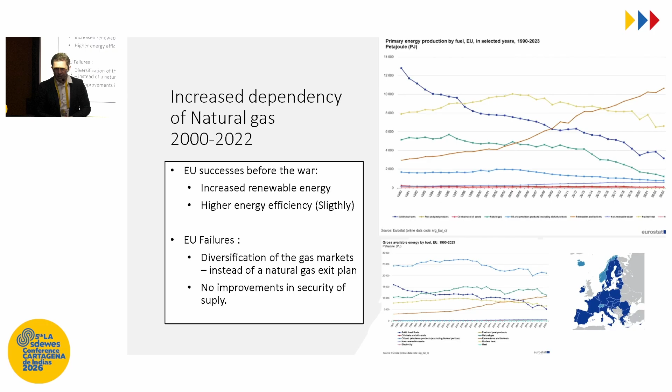The Juncker Commission in 2015 said they wanted to diversify the gas supply for Europe. That failed miserably, as I think is clear to everybody. So there's really a lot to say about what happened before the invasion of Ukraine on the 24th of February 2022.

The dependency was particularly large on natural gas, and the thing is, when you can transport something through a pipe, it can become very, very cheap. If you have a source and you can simply pipe it to Central Europe, it becomes a cheap commodity, which is of great interest, knowing that you have to produce something.

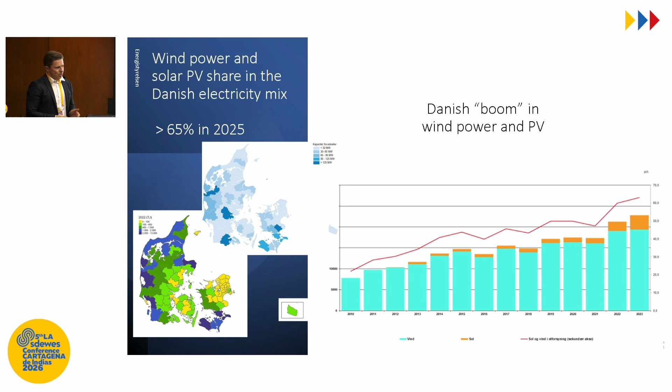What's important to understand is that Denmark is also a little of an outlier. I'll come into that in a minute, where I compare to some of the other EU countries.

When we do the transition and when we want to have better competitiveness in the EU, it's important we choose the cheaper electricity production option, and this is from Lazard, from a levelized cost of electricity. You can ask me afterwards about system integration costs, combining with batteries and whatever. But you have to understand that if we have an energy system mainly based on electricity and not burning fossil fuels, the system integration part is so minute and small compared to the overall cost of electricity production. So you want to focus on enabling a lot of the cheapest options on renewables.

Neven already talked a little about it - PV, especially utility scale, are very, very cheap options in many parts of the world. In Europe, onshore wind is cheaper in many places compared to PV. And after that we can also see offshore wind, which is down here.

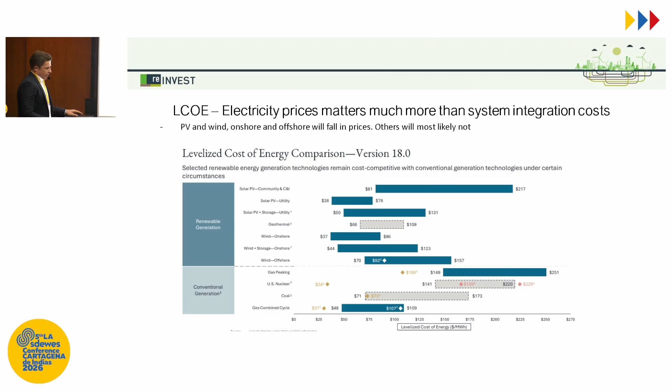So this would be the marginal price. But for me, it's a little strange to have this number here, because I'm missing the zero on the wind and the zero on the PV up here. So if we imagine some kind of imaginary bank that comes down from the moon and pays for the nuclear power plant and says, now you only have to pay $34 per megawatt hour, I would rather have they paid for 5 times the amount of renewables and said you have to pay zero for that. So this creates a lot of trouble, in my opinion, to understand this.

Another thing about the electricity supply from these renewables is how different they are. Now, in this part of the world, PV, of course, can dominate the system. But as was said, when you come up north, we need more supply of wind power as well. So if you have PV in Europe, or at least in the northern part of Europe, then around 85% of the production will be within half a year, in the summer and in the daytime. And there'll be very little production in the wintertime. And we use more energy in the wintertime.

And here actually wind fits in very well. The wind production curve is blue, you can see it's slightly higher in the wintertime. When you design the system, it's really important to understand these elements - we call it the capacity factor. So if you have 1 gigawatt of PV in Europe, maybe it's around 15% capacity factor, or full load hours, however you prefer to call it, whereas onshore wind would be between 25 and 40% depending on where you are in Europe. And this has a huge impact also on how you design your electricity grid.

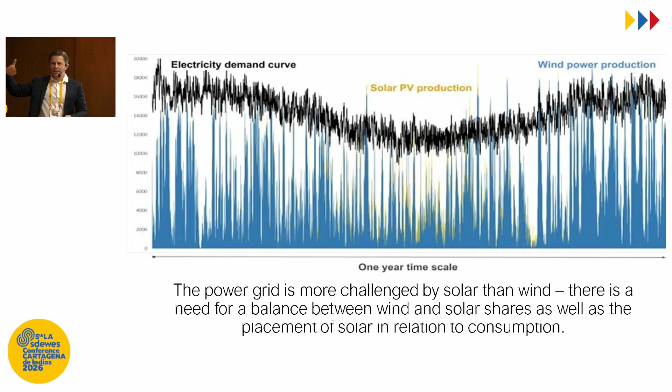It's a little hard maybe to see this, so I'll try to explain it. If we look at the Danish system, it's often looked to as a sort of role model for what you can do. But in effect, Denmark is a very, very small country surrounded by countries that have 4, 5 times, even 20 times the electricity demand that we do. Of course, we don't have full connection with these countries, but we have connections with them. If we had no connections, we would not have 65% wind and PV.

We would have somewhere around 45-50% - that would be the maximum in the combination of wind and PV, from a structural point of view, also considering what we lose in summer. This means that if you transfer the 65% figure to all European countries, you're making a really bad mistake. You can't simply copy that number. You can do something by changing the demand side - I'll get into that in a minute.

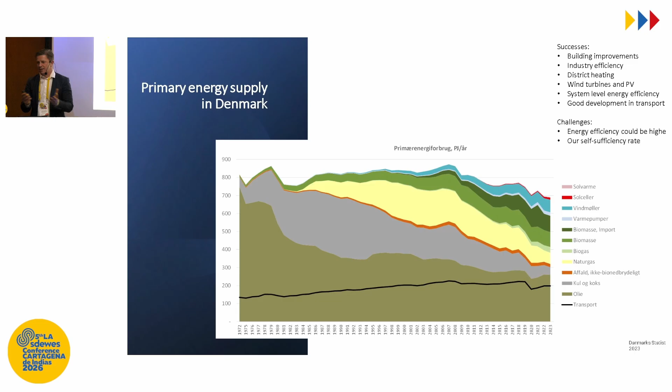Anyway, so what has started to be done here in Denmark is to redesign the system so that we're integrating this in a smart energy system where we combine the different energy carriers - gas, district heating, and heating - to the electricity sector as well.

The goal is we aim for a 50% reduction of CO2 emissions from 1990. We achieved that, and in 4 years we aim for a 70% reduction of greenhouse gases - so by 2030, and this is going to happen. It's on track, mainly with known technologies. But it also means that the whole energy sector, more or less, has to be decarbonized. There will still be industry, transport, and agriculture, but to achieve the 70%, the electricity from the grid and the district heating and most of the heating system actually needs to be changed. But this can be done, and it's being done.

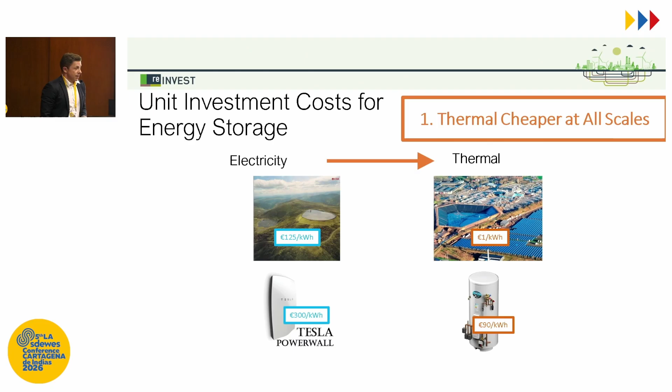One of the things that's important is to understand the storage. In a system not dominated solely by PV, storage becomes very important. We can see that thermal storage is 100 times cheaper than electricity storage, and bigger storages are much cheaper than smaller ones. So the trick is to use bigger, thermal storages. And we need hot water in the future anyway, so we might as well produce and store it as best as possible. This is what we're trying to do.

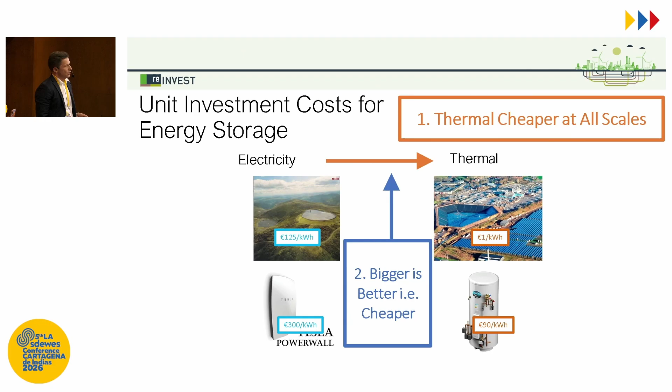In the old days, you would say we'd have wind power providing electricity, and a thermal storage tank where we'd get our hot water through district heating, and we'd stop the CHP plant. Then, when we have low wind, we'd run the CHP plant, fill the thermal storage, and still get our supply.

This is a little outdated because we don't need the power plants as much as we did in the past. In the future, we need power plants that operate maybe 5 to 15% of the time. We can still use the excess heat from that, but it's not always correlated with when we have heat demand, so we can't base a heat supply on it.

So we have to change this, and one way is to have a large-scale heat pump in the heating system. A heat pump has a COP of 3, up to 5, or even higher with a good heat source. What you want is big heat pumps combined with thermal storages, so you're able to supply much more of the heat compared to a system with so much combined heat and power.

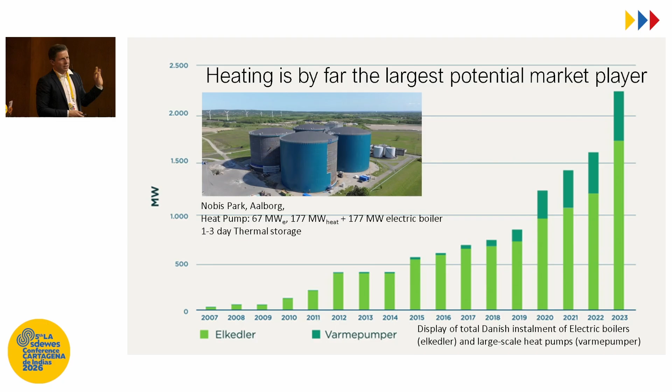So this is really an enabling technology. When you see a thermal storage like that, that is the most important renewable energy integration technology.

I think I spent a lot of time, so I'll just skip if I have more time.

We also want to store gas and liquid fuels. Some of you are working with Power to X. We talked a little about heating, which we can produce flexibly, and we can also produce Power to X fuels flexibly. If we want to have aviation and shipping in the future, we need to produce eSAF, ammonia, or methanol for the ships. Now, instead of storing the coal or oil on the input side of the ship, we store the product that needs to go into the ship. So we change the storage from the input to the output side.

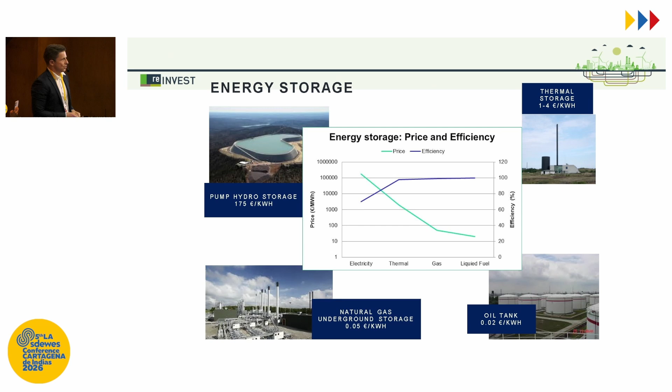This is really a key enabler to enhance the amount of renewables that we can put in. As I said in the beginning, the idea is to enable as much of the cheap electricity to come in as possible. So this is really, really important.

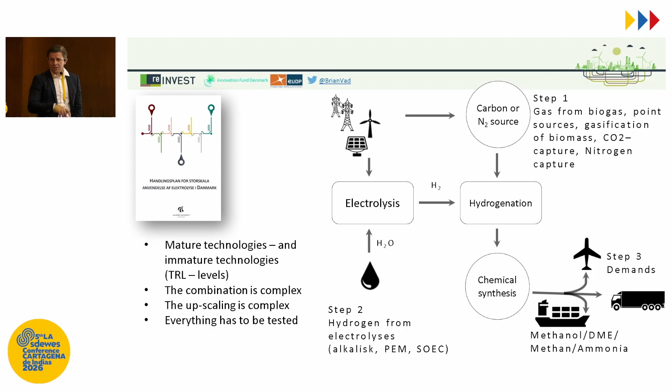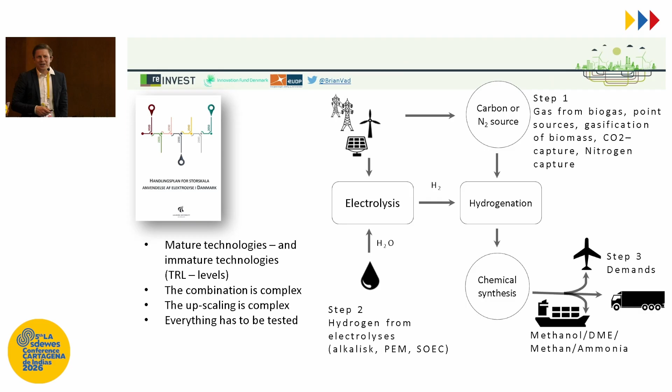I guess you know the electrolysis process. There's been a lot of hype about how fast you can do the deployment of electrolyzers. Maybe we can go into that in the questions, but it will take 10 more years before it's scaled up. I think we in Denmark now have 2 plants of 22 megawatts of electrolysis, maybe 3. But they need to go to gigawatt size within 10 years, and I'm sure that they can. People thought they would already be gigawatt size by now. Those people probably did not understand that upscaling is harder than what you can calculate on the computer.

So when you have more than 50% renewable energy, you want to start planning a little differently, because otherwise you end up with a copper plate. And it's really expensive to transport electricity. So if you want to deploy more renewables, they should be placed close to existing high demand hubs, or new demands that you want to put together with the renewables. If we don't do that, we will end up with a very, very expensive system, I would say.

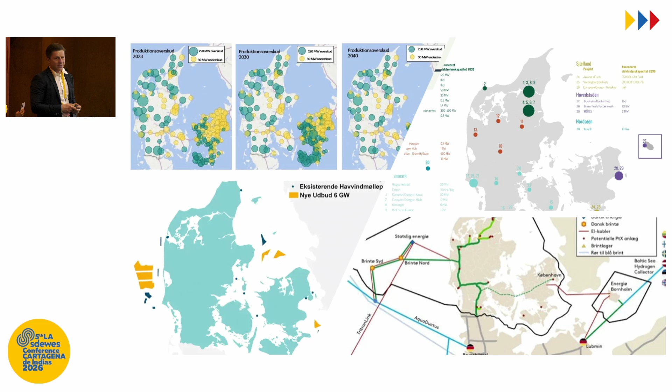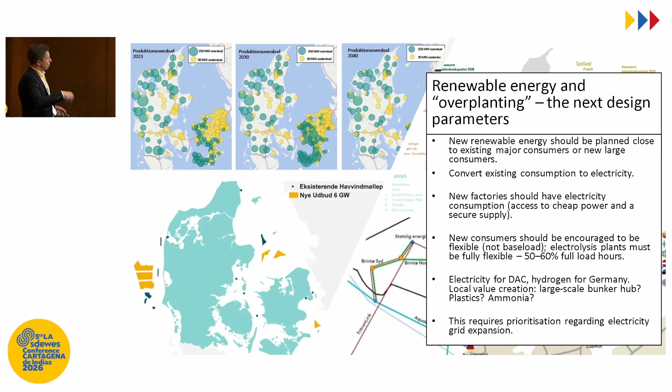This is sort of part of the new exercise. We're talking also about overplanting, so we have direct lines from an offshore hub to an electrolysis plant. It doesn't even go to the market, it's sort of outside the market. So there's a lot of thought going into this. Data centers are placed close to new demands, for example. So we need to have a rather good framework to do this kind of planning.

What you can electrify, we electrify. If we can do savings, we do savings. If we can do sector integration, we do sector integration. And we apply the cheaper storage options. When we apply the cheaper storage options, the prices on the system level do not increase - they can decrease or stay the same.

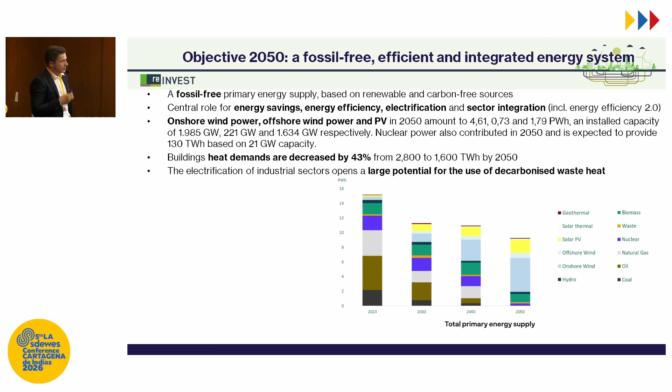What we did in this study was to look specifically at the heating sector. We do heat savings of 43% in the houses over 25 years, and we look at how we supply the heat.

The methodology we used for this study was to look at 3 different heat saving levels. We looked at geographical analysis of those future heat demands, so we know the heat demand in Europe down to 100 by 100 meters. We make a comprehensive assessment of waste heat and renewable heat potentials, and make geographical analysis of where they're placed compared to the demands.

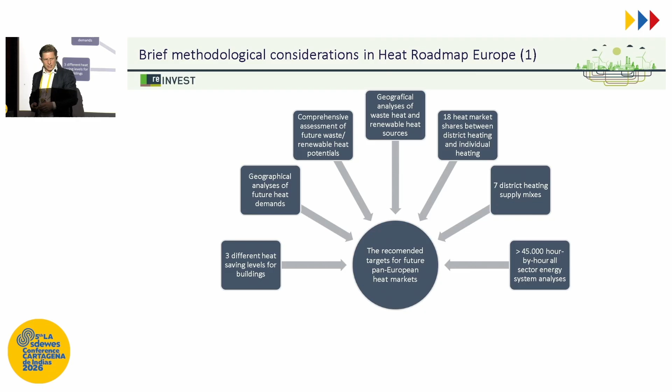We look at 18 different shares between more district heating or lower district heating and more individual heat pumps or less individual heat pumps. We look at different district heating supply mixes, and we do a lot of energy system analysis.

We need to use that. If the temperature is right, we use it directly, otherwise we use a heat pump. In these analyses, what we did was combine energy system analysis with geographical analysis. We estimate that we are able to use 650 to 900 terawatt hours per year.

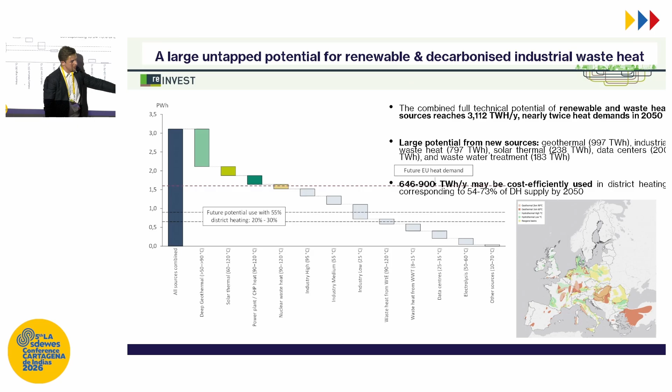This map down here shows the geothermal potential in different layers that we analyzed, for example.

The key thing to make this happen is to expand district heating. You can't use waste heat unless you have something to transport the heat with. So we did a lot of analysis on that, and it needs to be expanded - we suggest to more than 50%. From a research point of view, we could probably go a little higher. This sounds like a lot for most Europeans, but it's a more pragmatic number than a lot from a calculating point of view.

Some that have very low potentials are Croatia, and partly also Hungary. But all of this has to do with how far the houses and the heat demands are from each other, and how close are they. We have maps of this where you can go in and see, okay, we have a high temperature industry in this area - combined with where the heat demands are.

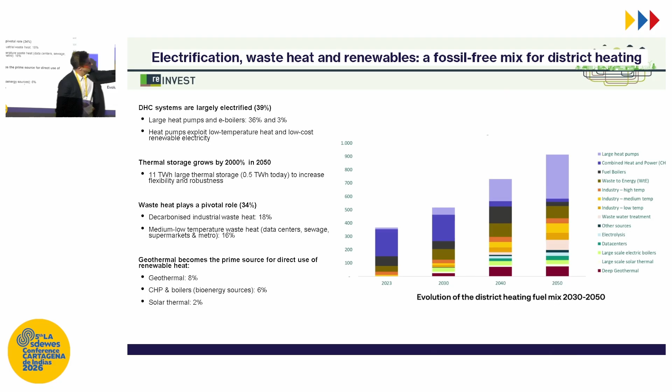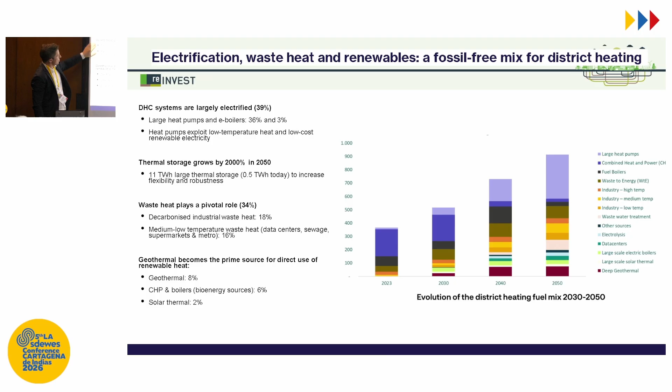Very quickly, this is the district heating production. This represents large-scale heat pumps, which you saw is being deployed already. So with the district heating system, we can actually have almost 40% electrification. We have thermal storage, we use waste heat - more than a third of waste heat is used, and we use around 10% renewable sources for heating.

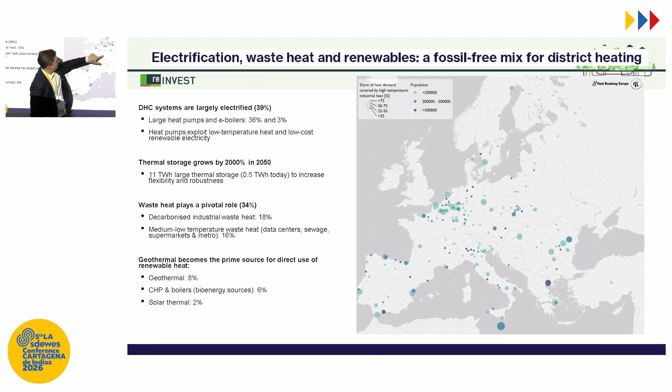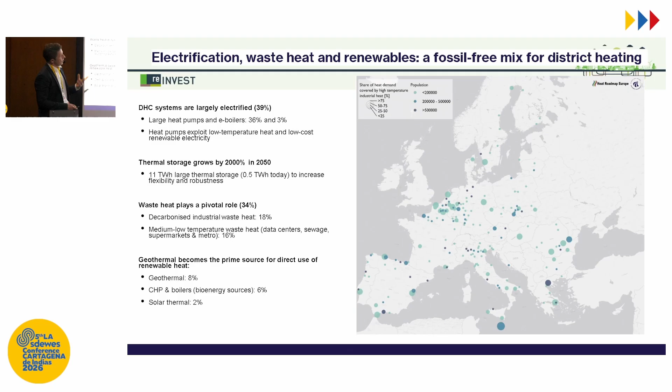On a map, we have, for example, here the high temperature heat, industrial waste heat, and you can say, especially in the Benelux countries and the Ruhr district, you have a high concentration of heat that you can simply use directly into a district heating system. But there are many other places - this is only representing where there's waste heat and where there's heat demand in buildings, so there are actually more. They're just not close to the heat demands.

So you can go in, and I can send you the report. I would just like to mention that when we do this kind of system, we reduce the overall system cost by 2 to 3%, including the expenditures for vehicles. So that's the system level reduction when we have a smart energy approach. Of course, it doesn't sound like a lot, but when you consider it's the whole system - and this is only the heating sector we're changing.

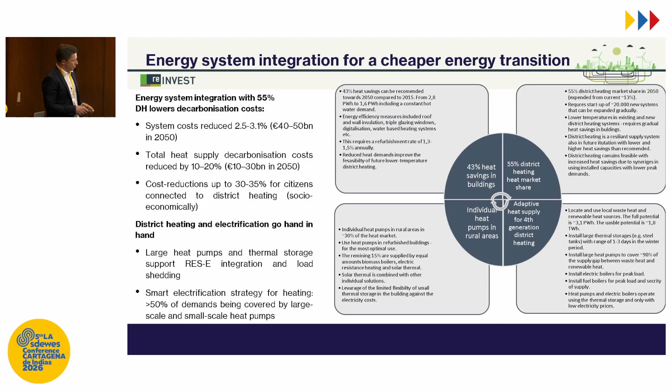It's quite a lot. For the heating sector alone, a redesign means 10 to 20% lower cost. And that will mean that those who have district heating will have much lower cost compared to today. So it really creates a much more resilient system. So if we want to attend to the geopolitical challenges we have, we need to try and harvest some of these very important redesign options. Thank you for your attention.